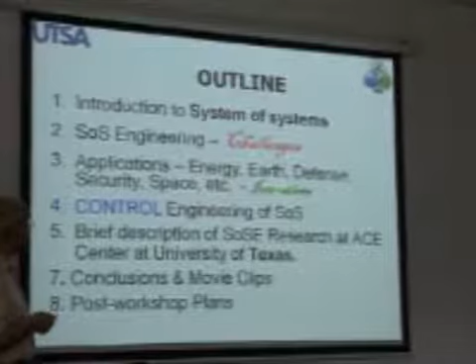Okay, so I would like to introduce to you what is System of Systems, what are the challenges, what are the innovations. And then I'll talk about control engineering, because that's my area which we are trying to progress, controlling a number of systems which are wirelessly connected together. They're not connected by wire, only wirelessly, which is very difficult in itself. Then I will talk about our activities at the University of Texas. I hope to have some conclusions and some movie clips.

And then I'll talk about the workshop which we just came from at the IIT Kanpur. We had a workshop sponsored by the Indo-US Forum on Science and Technology on System of System Engineering. And I'm very happy that System of System Engineering is getting a good start in India. You'll hear about it later.

So, as you know, since 1995, Internet has connected the people of the world. There's hardly anybody who is not using the Internet in scientific work or even the financial, commercial, and other world. Internet is connecting people together. System of System is a generalization of this connectivity of systems, or systems and people. So we want to have systems talking to each other, okay? And it's possible that we have people connected to the systems, okay?

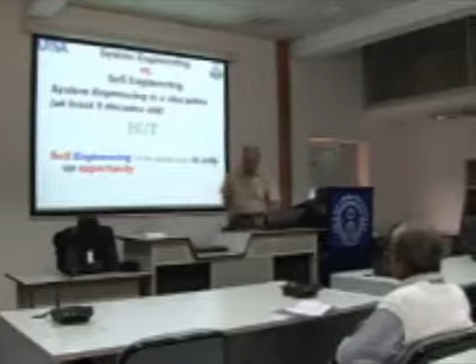So what I would like to make clear to our friends in the engineering field is system engineering versus system of system engineering. What are the differences between the two? System engineering is a discipline which is at least 5 decades old. But system of system engineering at its present situation is only an opportunity, meaning that we have a long way to go from system of system to system of system engineering, because a lot of issues are not resolved. Theory and application are not resolved. So, for example, here you see scholar hits on Google up to the year 2005 on system of system versus system of system engineering.

The system of systems hits are exponentially blowing up to large numbers, in this case around 300. And then in system of systems engineering, at that time, it was very low. So you see the big gap between system of systems engineering and the challenges which are involved here. It's our duty, it's my challenge, and people around the world, to close this gap between these two.

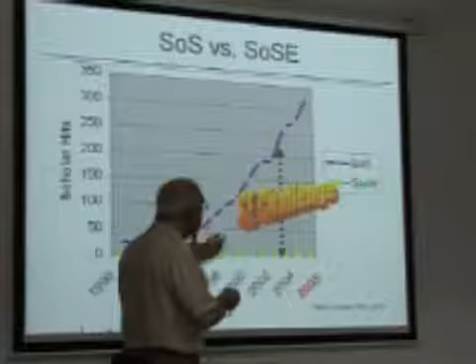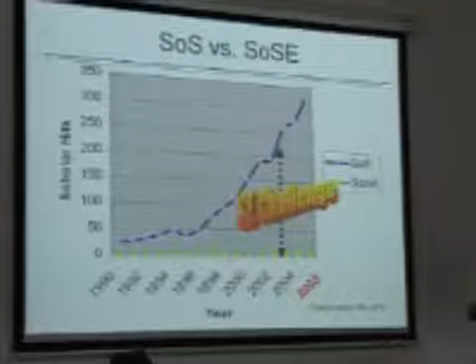Recently, I Googled this concept myself, and system of systems is still over 1.5 million. This one in thousands, only a few thousands. And if you Google system of systems and my name, you get about 10,000 hits. And a lot of them are not relevant to system of systems engineering.

So here is system of systems. In order to go from system of systems to engineering of systems, everything has to change. Modeling is a brand new idea, because you cannot model a system whose mathematical representation is not possible. You just have communication links between the two. Simulation, emergence, architecture, control, cybersecurity, network centricity, ethics, all of these issues have to be reckoned with, have to be discussed, and a lot of smart people have to work on these problems.

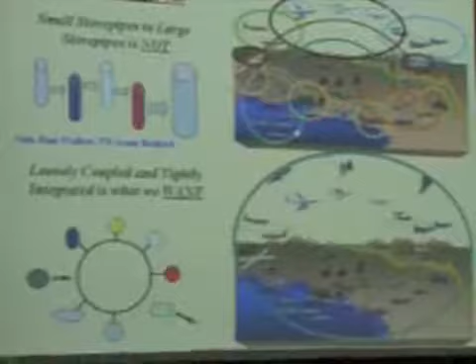So what are the examples of this? Here is a military example. In many applications in defense, especially in the United States, you have small stovepipes up to large stovepipes, which are sort of a few systems here, a few systems there, but they're not really under one umbrella, together.

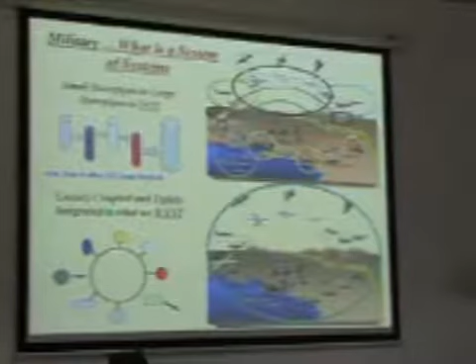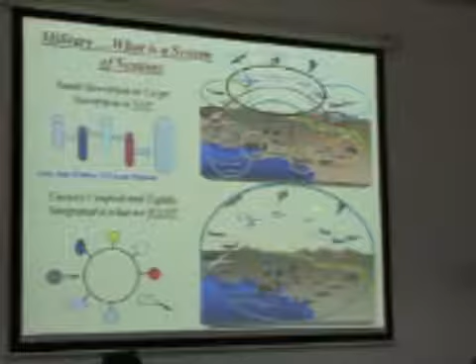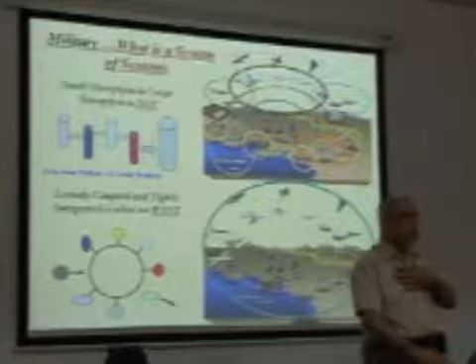What you want to do is to couple them loosely and tightly, integrate them into what we call a network. So you put a network all the way around. Everything you see there, you can put them all together here. So this will allow the American Army, American Navy, Air Force to work together, to put all their resources together. So the word system of systems is not my idea, my terminology. It's the Department of Defense of the United States.

You know, my colleague Dr. Sahni, who was in Kanpur, heard a presentation of our friend Mr. Wilbur from Boeing. As you know, Boeing is trying to put a 787 aircraft into the market with problems, and the system of systems for that aircraft is called E-enable. E-enable meaning that this aircraft could have problems in the air. It's connected by satellite and by ground to all the other aircraft and the control tower, and then the system of systems from the cockpit will relay these things and warn them about the problem.

The people on the ground know what is wrong with the aircraft before it arrives. And they make the parts ready, mechanics are ready, and when the aircraft comes, they fix it. So this will be an integral part of it.

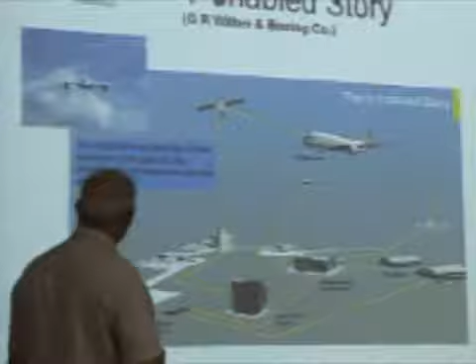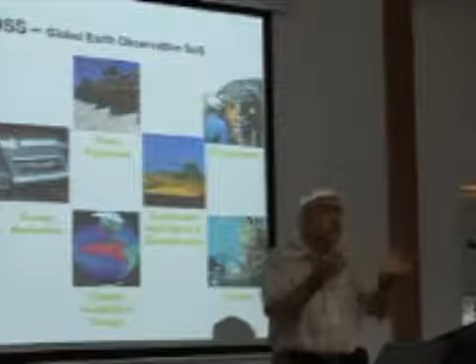Another application of that is what we call Earth sciences, a global Earth observation system of systems. Since the tsunami disaster we had in Asia, including India, the world has now been connected by a warning system to give early warning to countries like India to move inland so the tsunami will not damage and take the lives of so many people.

So an airport is a system of systems, consisting of the baggage handling system, air control tower, plane with crew, freight, reservation, etc. So the entire airport is a system of systems. One aircraft is not a system of systems, it's only one system. But the airport is a system of systems. So is air traffic control. Going from one airport to another airport is a system of systems which helps route the traffic and monitors the aircraft.

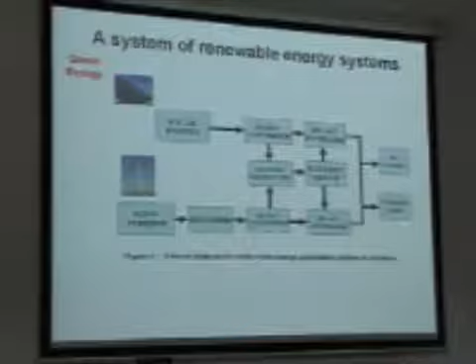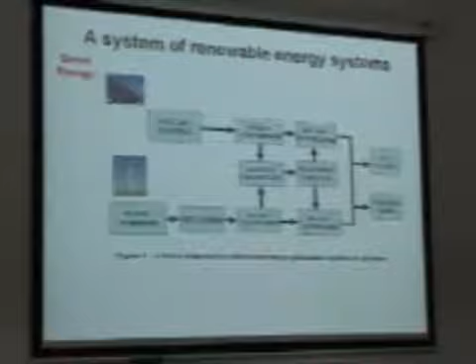Then you also have smart meters, which monitor the expenditure of energy in all your equipment in the house. And this smart meter is connected to the local area network, which could be the province of Agra. And then it will go to, let's say, the northern grid of northern India, and this goes to the entire Republic of India. Okay? So it can go from your home all the way to the Republic of India. It's network connected together. This whole thing is a system of systems. The objective is to make energy production and energy monitoring all automated. Okay?

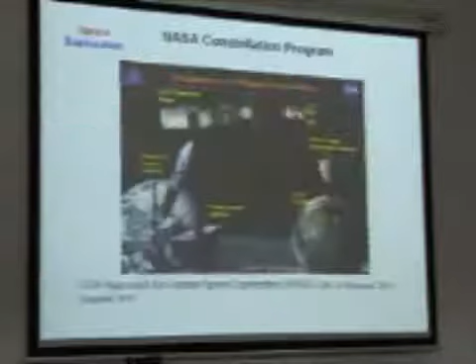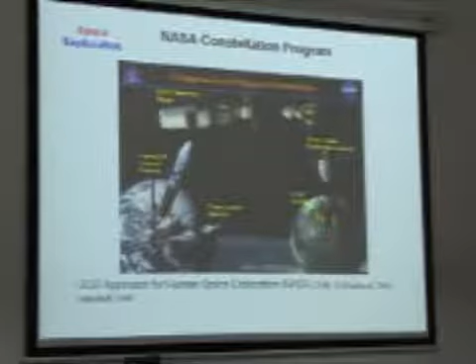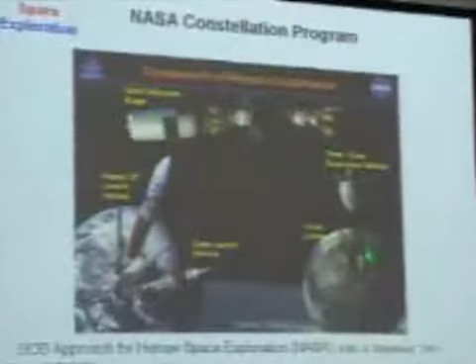If you want to go to Mars or the Moon, you can also use system of systems for space exploration. System of systems approach for human space exploration. This is the Moon, this is Earth, these are the rockets and the vehicles which take experiments and humans to the Moon. So the entire group is a system of systems. And these are all written in a chapter of one of my books, which I will talk about later on.

Modeling and simulation is another thing that needs to be changed. Therefore, you have to model a system where the mathematical representations of the constituents of the system are not physically available. Newton's law doesn't work. You don't have time for it. You know, thermodynamics doesn't work. All you have is data going from system X to system Y. And that data is the only information you have. That data coming out of system X is the behavior of the model of the system at that instant of time. And there you need to make the most of that information. So the philosophy of modeling has to change. That's the point I'm trying to make.

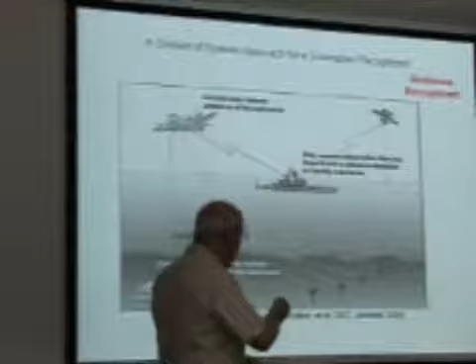This is an application where a system of systems is used for recognizing a submarine which may belong to the enemy. All these parts of the system are friendly systems, but this particular system belongs to the enemy. So in this case, you have not one goal, but two goals. The goal of this system is to find it. The goal of the other is to hide from the enemy. Okay? So this is the situation where you have work done by two different groups. This was part of the work of one of my PhD students, Dr. Sridhar, a native of Bangalore, who's now working for Microsoft in the state of Washington.

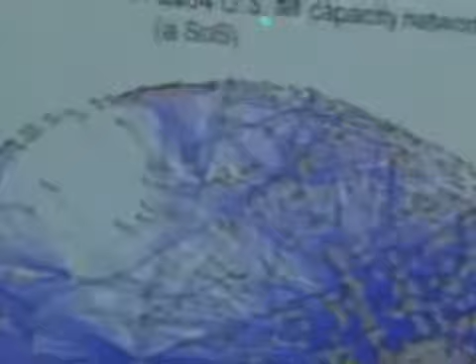This is another application of system of systems in the air transportation system. Every red dot you see here is one aircraft in the airspace of the United States. And this is a visualization of the 2004 air capacity network for the United States.

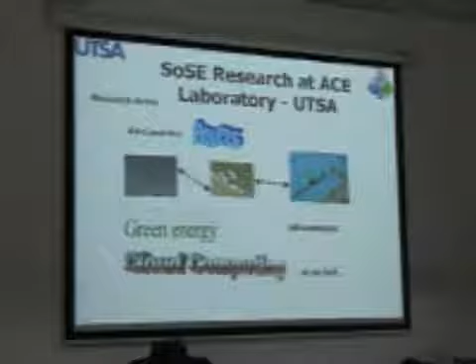This is now a summary of what we are doing in Texas. Our research areas are air, land, and sea rovers. This is our air, land, and sea rovers. We have rovers which work under the water, as well as, see, my colleagues are joining me from the hotel, with one exception. Then you have green energy activities, and another area which we recently started, cloud computing. Okay.

So, as I promised, I want to emphasize the control aspects of systems, because that's my field. I've been a control engineer for roughly 42 years. So control engineering, like any other field of systems engineering, is being pushed and challenged to deal with systems which are not physically together. They are wirelessly connected. They may not even be on the same planet. Okay? They may be miles and miles away from each other. What makes it difficult for that system to be controlled is that a lot of information is coming from far away places. Not everything is sensed right on board the system. Okay? So you have basically an ad hoc wireless network in your feedback loop, which can be anywhere.

This is a sort of a pictorial of the same concept, where you have 4 systems as a system of systems: 4 actuators, 4 sets of sensors, 4 controllers, which have communication channels or wireless connections and physical connections. And you can see that some of the controllers are using information from other systems to control their system. And this was the subject of a PhD student at Caltech a few years back.

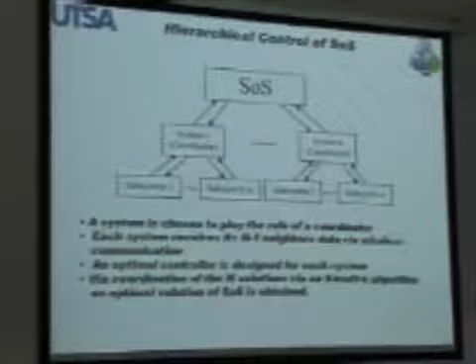So how many different control paradigms are possible? Hierarchical, decentralized, consensus-based, and network. I will briefly go through some of these. Hierarchical control has been around since basically the 70s. Mesarovic at Case Western Reserve came up with the idea of hierarchical control, where you basically look at subsystems of a given system. From the top, their solution gets coordinated. From the bottom, they have isolated solutions. And by exchanging information at levels, you iterate enough times to get a feasible and optimal solution.

And in this case, a system is chosen to play the role of a coordinator. Each system receives its n-1 neighbors' data via wireless communication through this. And then an optimal control is designed for each system. By coordinating these n solutions by some iterative algorithm, through this communication, repetition of communication information, you come up with a solution. I'm going to skip this because it's all optimal control theory.

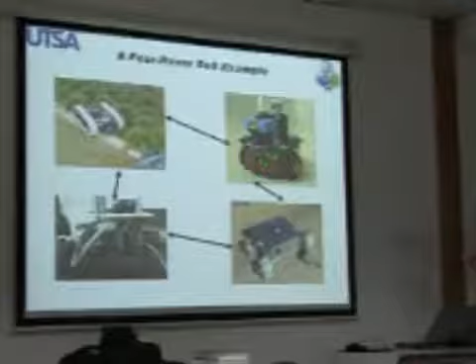And here is an example. Suppose you have 4 rovers. This happens to be one which was developed at JPL at NASA. This is a commercial Pioneer robot. These are some of the robots we built ourselves in Texas. And here is essentially a depiction of that 4 system of systems example, here's 1, 2, 3, 4 systems. Some of them are physically connected, as you can see here, but a lot of information is shared by wireless communication.

So we go through the mathematical representation, which is assumed to be linear, time invariant, which itself is far from reality. But eventually, through a hierarchical control algorithm, communication error goes to 0. And these 4 systems establish a normal channel of communication among themselves. At that point, the system has to be stable and has to give you the goal that you have been seeking to connect them together in the first place. These are some of the simulation results on MATLAB and Simulink.

And you can also do it decentralized or distributed control. Basically, you have n local controllers, which use wired interactions, wired connections, but you also have a global controller which uses wireless interactions, which will help give you an additional control component, which is based on wireless information from neighboring systems. We call that global control. So a combination of local and global control will help you, and you can actually show, depending on the amount of delay in the wireless connection and the controllability and observability properties of the system, that this system can be stabilized, would become stable.

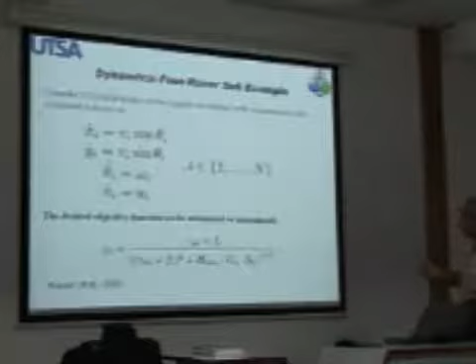A simulation of this was done by one of my students at Kanpur, Anjan Kumar, soon to be called doctor, and this is the objective function. These are the dynamics of n of those. This is the solution to the optimal decentralized controller, and these are some simulation results.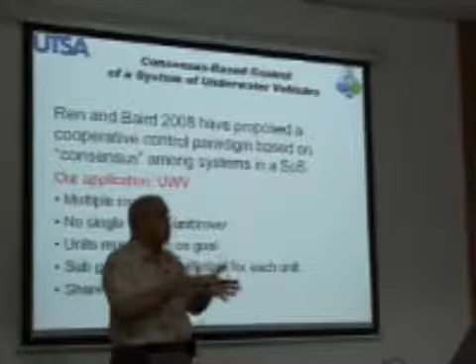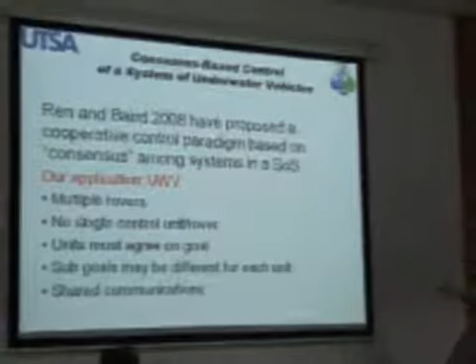Consensus-based is an area which my colleague Dr. Hadaegh from JPL has been pushing for another system of systems which he calls, and is now becoming very popular terminology, formation flying systems. And basically, you can bring telescopes, you can bring, let's say, many different space vehicles into one formation, which will allow you to do a lot of good things that a single one of them cannot do for you. So consensus-based has been used for that in what we call cooperative control mode. And in our case, we used it for underwater vehicles.

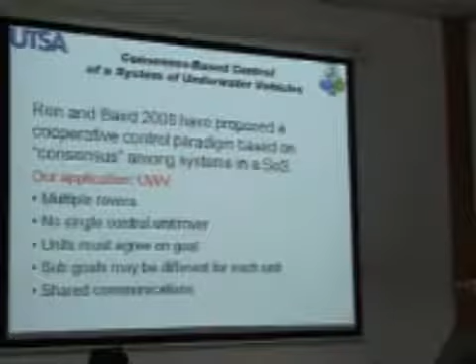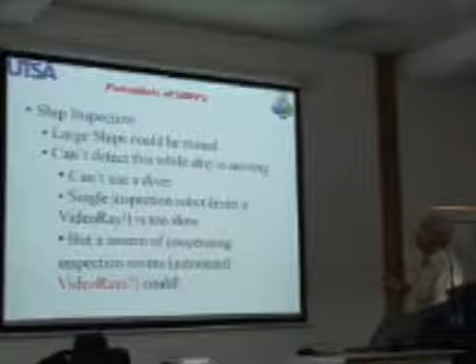Applications of underwater vehicles are, for example, going through this consensus communication among them. Multiple rovers are involved. No single controller unit or rover can do all the job. Units must agree on a goal. Sub-goals may be different for each unit, and you have to share communication among yourselves. So here are some of the potential applications, from a large ship, where you need to detect potential problems, detect maybe attacks or bombs or what have you. No single diver can do these jobs. The single inspection robot cannot do that, and it may be even too slow.

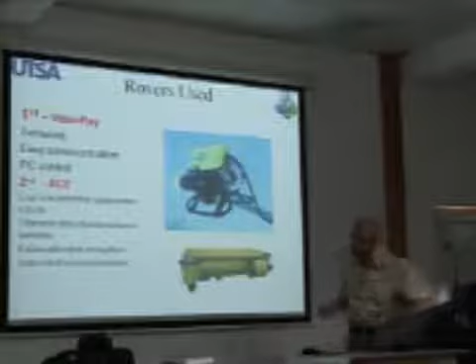So you want a swarm of cooperative inspection rovers, automated, for example, VideoRays, which could go around it. This is a VideoRay robot. We have 2 of those in Texas, and this is an autonomous one which we built ourselves. And so we have 2 different kinds of underwater rovers. Here is the communication protocol for consensus-based. Basically, each vehicle has a token, has an ID.

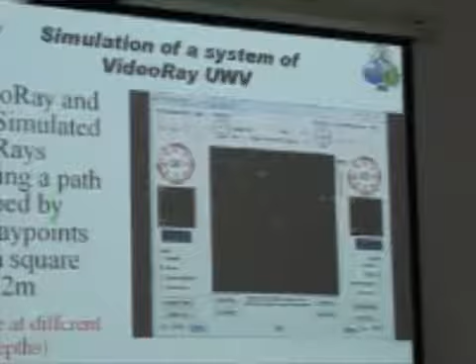And then you basically come to the point where if you want to increase the speed of the rovers, you shorten the distance and they move faster and faster. Here is a simulation of that scenario, with a combination of a real submarine and simulated ones. Those in the circle down here, those two are real UWVs, and the rest are simulated UWVs. And we did that for different depths. They all have different depths. And we use consensus-based control to run this controller.

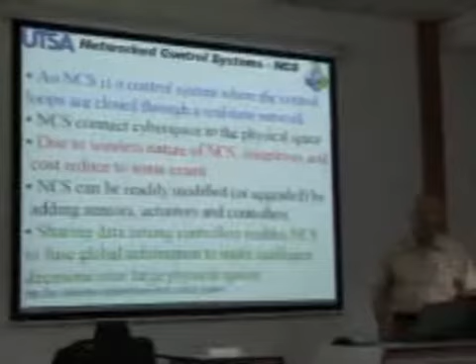And now here's the network control. Network control is an integration of cyberspace and physical space. But due to the wireless nature of network control systems, complexity and cost can be reduced to some extent, because the information that you normally want to go from one system to another goes through the communication channel. You don't have to dynamically represent it in the model, for example. And this can also be modified. You have a situation, as we said, that the control loops are closed through a real-time network. That makes it so tough. And sharing data among controllers enables these systems to fuse global information to make intelligent decisions over large physical spaces.

Therefore, you have two delays. We call them forward delay and backward delay. And they are two different animals. They cannot be treated the same way. As you will see, the backward delay can be handled by a Smith predictor. This one has to be done by a non-Gaussian distribution of noise, which we call Levy's alpha stable distribution. And the communications could be by field buses, control area network, local operating network, LON, could be Ethernet, could be Bluetooth, could be Zigbee, and so forth. And my students are actually using most of these in the lab right now. And these are the applications of network control, which you have already seen.

In some situations, the time delay is random. If these systems are on the internet, and we in this room are all using the internet, keeping the net very busy, obviously the time delay is too much. So you have a burst of delays, depending on the time of the day and how many people are using their computers. So one way to deal with that traffic jam or saturation of data coming in is to slow down the sampler to make sure the data is all clear through the network before the next sample. Okay, this will give the system the chance to revive itself. So here is another block diagram of a network which is controlling a whole bunch of systems and hosting controllers, systems, sensors and so forth.

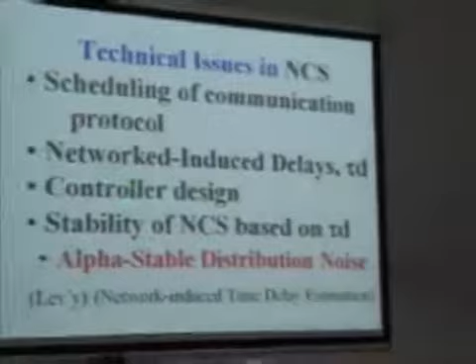So what are the technical issues on network control systems? Some of the most important technical issues are scheduling of the communication protocol, network-induced delays, which we just talked about, design of the controller, which happens to be actually not a big issue as long as these problems are solved, and the stability of network control systems based on time delay.

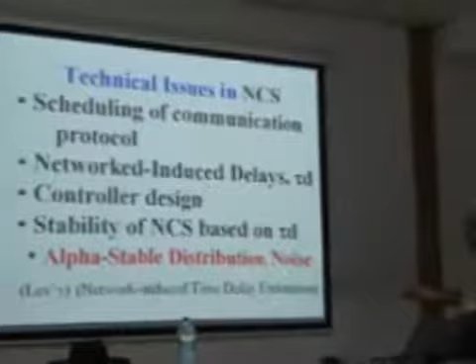Fortunately for this problem, theory is there. You can actually have the delay in the network be less than an upper limit to guarantee stability. Actually, I'm teaching that in my classes this semester. And this is what I was talking about, the forward delay. Forward delay has to be estimated using alpha stable distribution of noise. This is a theory which came into the mathematical world by a mathematician called Lévy in the 1930s. This is used for estimation of network-induced delay.

For my students, before I taught them network control, I had to teach them control, modern control, time delay control, and then bring them into the real network control issue. Let's say you have a plant here, you have a controller, in this case a PI controller, and you have a delay. Unfortunately, delays are not lumped values which you can put your finger on. They're distributed. They're random. It's very difficult in network control systems, which are a candidate for system of systems.

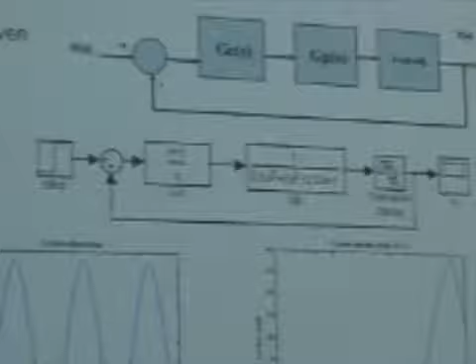Without the delay, the system is well behaved because of the location of the poles. But when you add the delay, the system becomes unstable. That's what we are trying to avoid in real-time system of systems control. What we did next is to approximate that time delay by what we call Padé approximation. We got the same behavior.

Next, we used a Smith predictor to reduce the effect of the delay. A Smith predictor works like this. You come up with a model of the plant, you come up with a model of the delay, and you find the difference and you feed that back. This came from a control engineer by the name of Smith in, I think, the United States in 1957. So we implemented that. This is an application of it in Simulink, and we stabilized the system. You can see we went from this to this.

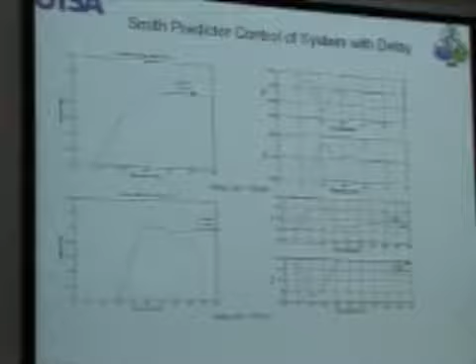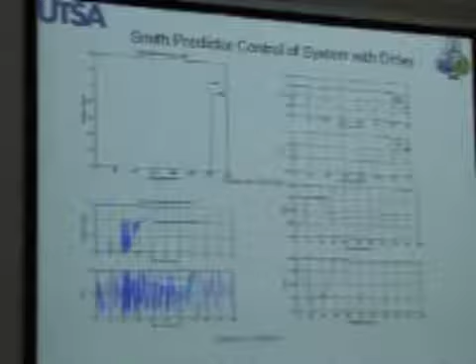Now, if we put an adaptive loop on it, which is shown also here, here's your plant, here's your Smith predictor, here's all the logic and dynamics for the adaptation using least mean square minimization, sort of like a gradient approach for estimating the value of the delay. We were then able to play around with various different delays, and each time the system remains stable. From 1.8 seconds to 12 seconds to 300 seconds to a random variable, the system is still fairly stable.

Next, we'll make that delay follow a non-Gaussian noise, namely alpha stable. This is typically how you can represent the delay in a computer network, like your internet use. You see, these are the bursts I was talking about. Now, there is a parameter called alpha. If alpha is equal to 2, this becomes Gaussian. So Gaussian is a special case of the alpha stable distribution.

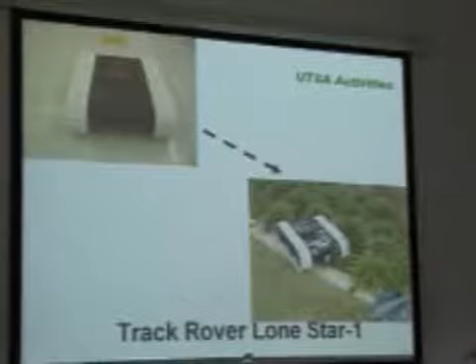Now, let me show you some of the projects we are doing in Texas. Since I've been in Texas for the past 4 years, we have been host to a number of international students, including Anjan Kumar from Kanpur, who came for 8 months to San Antonio and worked with my students. One of the advantages he got from his experience is he got his hands on the hardware a lot. He learned everything inside out about GPS, and he developed a lot of things using GPS.

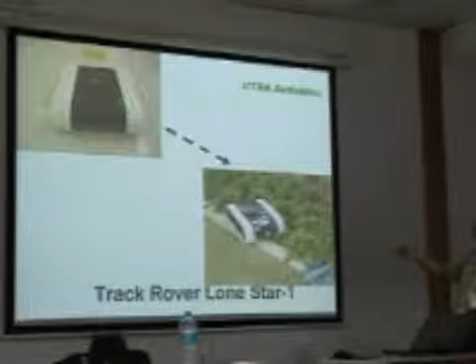So what we do in Texas with my students, we buy a basic vehicle which has just 4 motors, and we load it up with our own electronics, our own sensors. This becomes our finished product. This is a swarm of robots, which will eventually have 26 of those, wirelessly connected together by Zigbee, and connected to one single laptop. And they have consensus communication among them. This is a picture of our underwater robots, which was built and painted by my student from Australia, another visitor, Matthew Jordan.

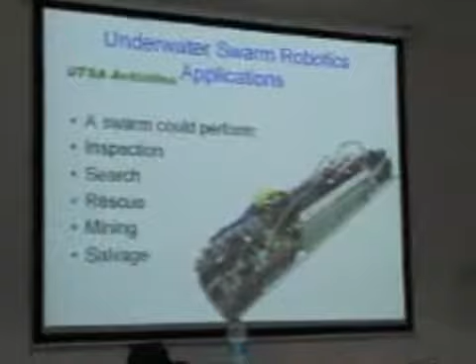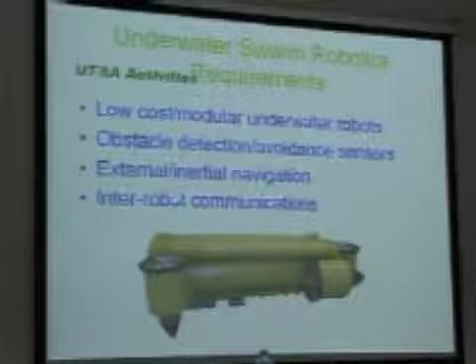Here's the inside of the underwater robot. This is the guts of it, and it has a single board computer in a plastic tube, which is the main body of the underwater robot. Here are its characteristics: very low cost, under $500, obstacle detection and avoidance sensors, external inertial navigation, and inter-robot communication. They're all there. I'll skip this.

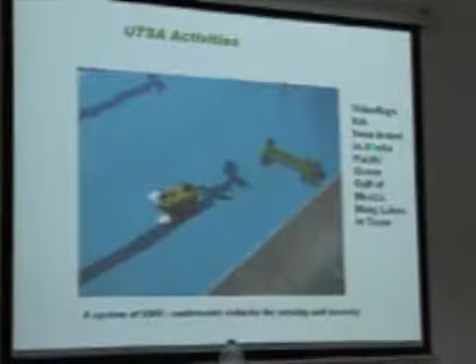These are some of the scenes from our application in the swimming pool. I might also add that our VideoRays have been tested and worked in Alaska, in the Pacific Ocean off the coast of Hawaii, in the Gulf of Mexico, and many lakes in Texas. So we have also gone into real oceans, real water.

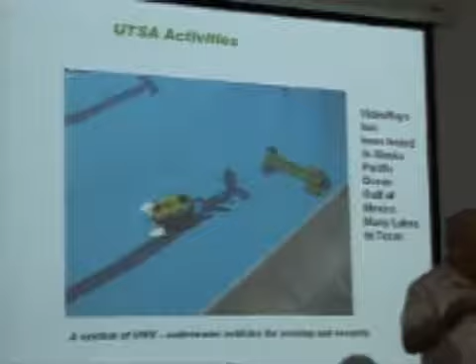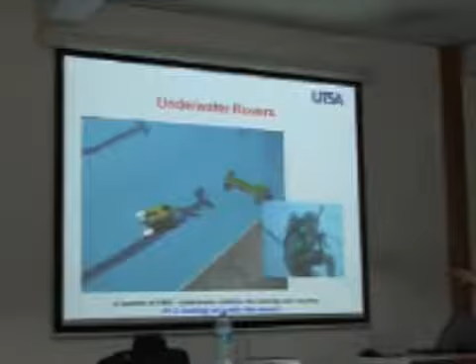Here is another scene. Here is myself, I also go there. I used to be a novice diver. I went there and helped the students. When they finished the experiment, then I swam for exercise. Not bad.

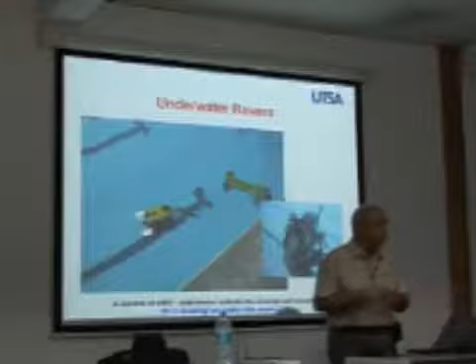Again, this is another scene of the rovers in action. Students are working. And here's a laptop which is connected to the underwater robot, and there you can see under the sea with the various cameras which are connected. This is a torpedo, a small mechanical electronic torpedo, an electronic fish, which we use as an obstacle under the water for the rover to avoid.

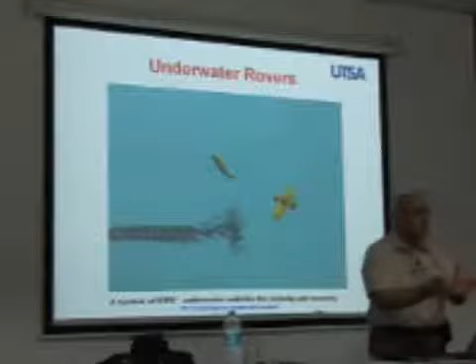This is a scene from a public broadcasting system television show in Texas, which I'll show you later on in the movie. Here's another Indian student who built this robot by himself, Vikram Raghavan, who is now working for an oil company in Houston. He's building a robot to go into the oil pipe to look for leaks of oil. Isn't that fantastic? Unfortunately, he was so good, he was absorbed, I couldn't afford to keep him as a PhD student anymore. So I'll show you this movie later on.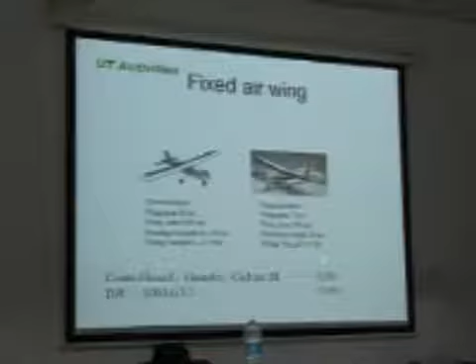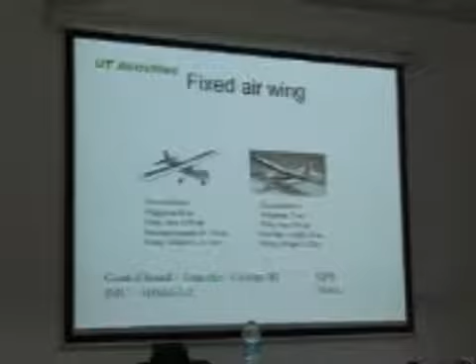And we are also now in the air. Here we have fixed wing aircraft, we have quad rotors, and we have several GPS modems on them. This is the information. We have one with an 80-inch wingspan, 70-inch wingspan, wing area, and so forth. Most of them have a Gumstix control board on them. One of them even has an autopilot, where we don't have to worry about keeping it stable up there. We can do experiments.

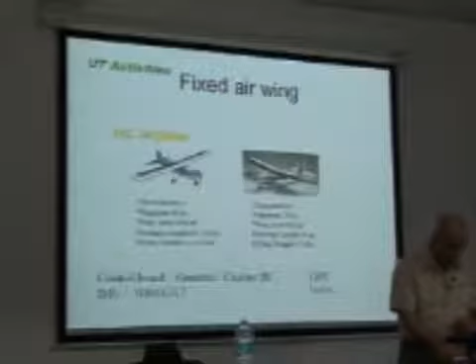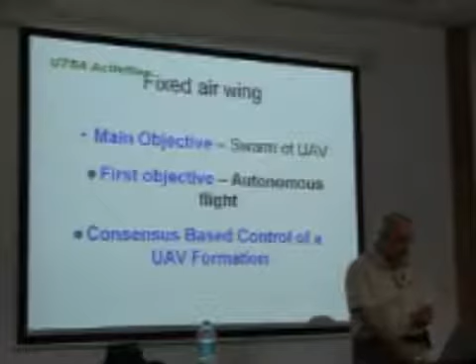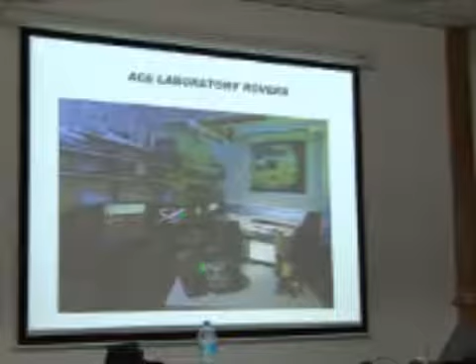And the objective is to have a swarm of UAVs. We want them to do autonomous flight, and we want consensus-based control of them as a formation. This is the first flight of our first UAV. This is a scene from a corner of our lab. We have the UAVs, we have land rovers, we have underwater robots, and so forth. And this young man is Aldo Jaime, a student from Bolivia, who is heading the group of UAVs.

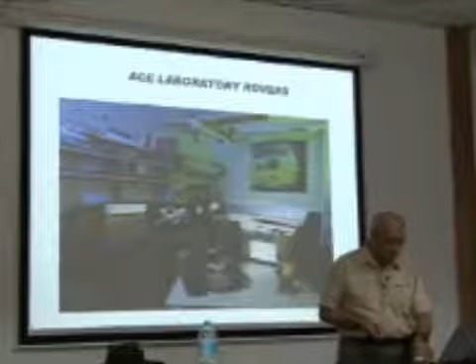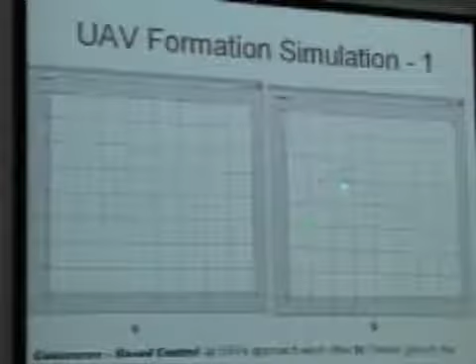This is an actual UAV test. We did it, and you'll see a movie of it later on, which is also on YouTube. This is a recent simulation of consensus-based control of the formation of UAVs. Here, the blue ones are 3 UAVs. The red parts are obstacles and other things going on in the air. Then consensus has been established among these 3 UAVs, and they create a formation. Then we have waypoints here and other places where the formation goes first, like so, or they come back here to another location.

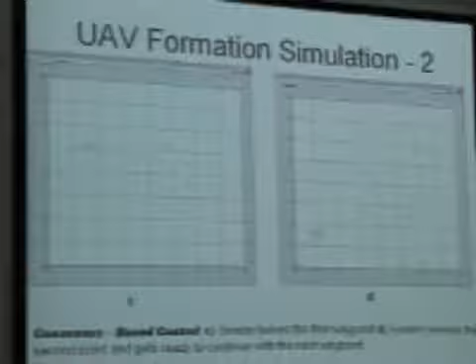What we want to do now is to do it in a real-time application, because we have 3 UAVs. We can put them all in the air. Eventually, we also want the UAV to talk to the land rover through a communication link. We also use fuzzy logic to control some of these UAVs. This is a fuzzy logic controller, done in Simulink, for implementing on IMUs on the gumstick inside the UAV.

We are also building our own UAV, a group of students, for maybe about $4,000 or $5,000. We also put a generator on it. We have onboard energy generation. And we want to send a team to a national competition next year to compete against other student groups like Stanford or other universities in a UAV competition. And here's a picture of their design. It's much further along than what I show you. A lot of things have already been built.

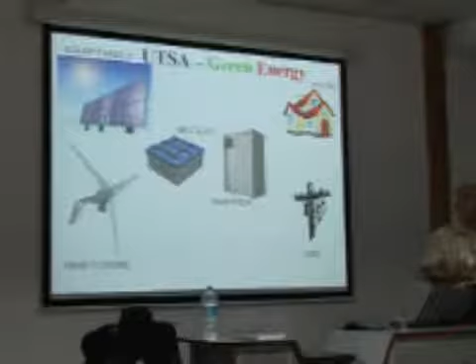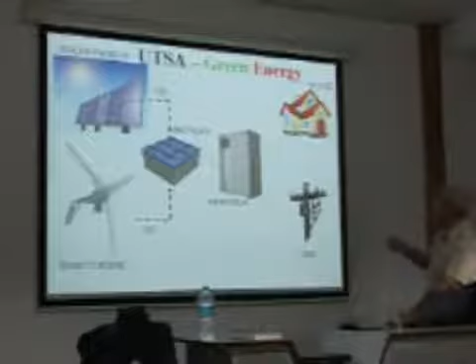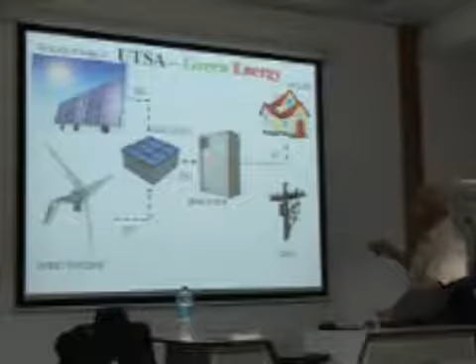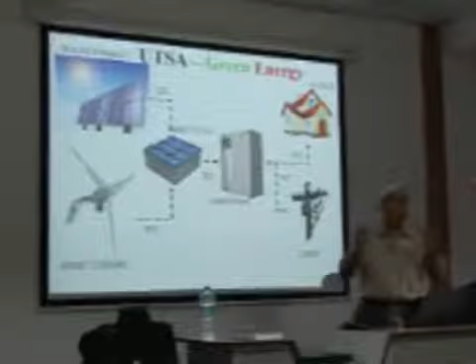Our recent activity is green energy, solar and wind, and soon fuel cells as well. What we want to do is get a solar system and a wind tower, connect them together wirelessly, and store their DC voltages in a battery. Then it can be inverted to AC through an inverter, which comes with the package, and then you can energize a building on the campus. Or you can also connect it to the grid. Okay? This system will be built in about a month or 2 in San Antonio.

And of course, they are all going to be connected together, and then we have a control center for the entire network control of this energy-producing system. We use LabVIEW of National Instruments to check everything, from wind direction to wind velocity to solar radiation to all the currents, all the voltages, to see what's going on with the system continuously. We may have 2 control indicators, one in the big building, one in the other smaller location.

Now, what is cloud computing? This is our last area of research. It is an extension of computer systems to virtually make available to you a lot of computing power which you can rent on an hourly basis. If you have a big problem you want to solve here in Agra, you don't need to buy a computer. You can buy time on somebody's server, which could be in Singapore. And you can borrow software for 1 hour from some server which is in Hungary, in Europe. That's the idea of having a cloud among all these things.

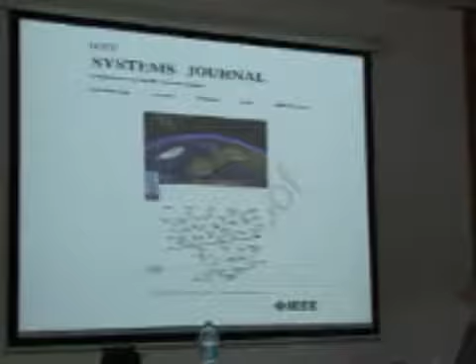In 2007, I established a consortium called International Consortium on System of Systems, where I put academic institutions and industry together to look at some problems. And I also invite international partners like India, Hungary, UK, Spain, Mexico, and so forth, and national academies and government. The idea is for the funding agencies to come and look what we are talking about without asking for money. Once they understand what we are doing, they get excited. They go back to their offices. They put money in our ideas. Then we are ready to apply. You see? That's the idea.

But when I try to sell that idea to the industry in America, they say, no, we don't want to be part of that. It's called international. We don't want to be international. We are worried about security, about ITAR and so forth, okay? Export control and so forth.

So now I'm doing a US system of systems network, which IEEE and INCOSE, two important system engineering organizations, will be involved. Purdue University, George Mason, MIT, our own university, Stevens. Others are Georgia Tech, University of Miami, Naval Postgraduate School, Old Dominion, and University of Southern California. I'm bringing a lot of important players in America into this network. And so far we have written a white paper which tells you what we want to do. What do we want to do?